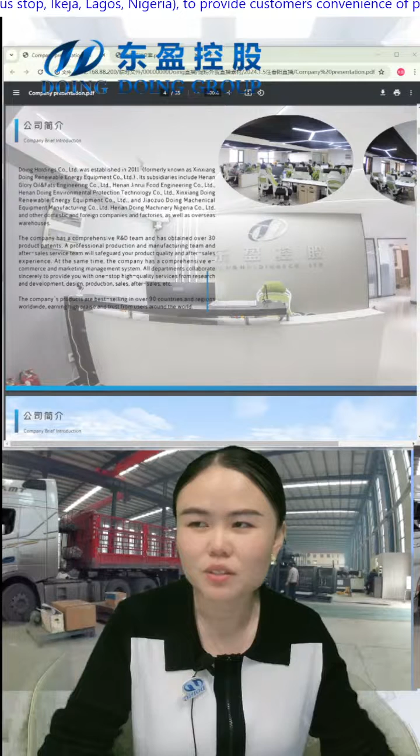Now its subsidiary companies include Henan Glory Oil and Fats Engineering Company, Henan Jinrui Food Engineering Company, Henan Doing Environment Protection Company, and Jiaozuo Doing Mechanical Equipment Manufacturing.

We also have our overseas company in Lagos, Nigeria. If you are in Nigeria or in the surrounding countries, welcome to visit our office anytime.

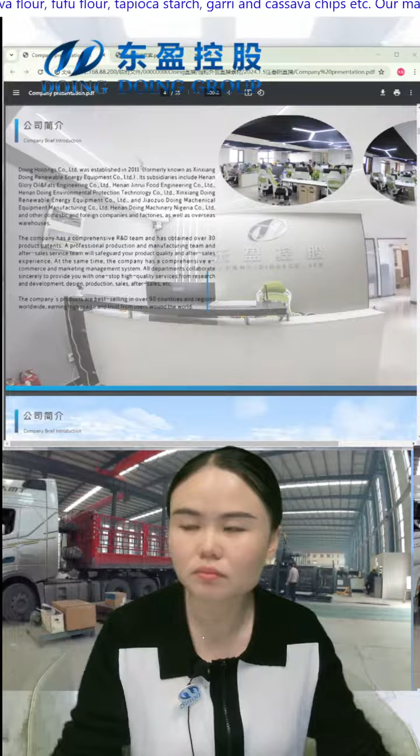Our company has our own manufacturing workshop and our own engineers, so we can supply complete service from the factory design to the equipment design, manufacture, shipment, installation, and after-sales service. Now our equipment has been exported to more than 90 countries around the world.

Okay, now what you see is our factory. It's located in Wuzhi County, Jiaozuo City of Henan Province. It's about 50 minutes from our office to the factory by drive. Our company was established in the year 2011, but at the beginning we were a trading

company, and in the year 2016 we owned our own manufacturing workshop to fabricate machines. So we can ensure that our price is the most competitive based on good quality and the same machines. Now the total area of this workshop is more than 10,000 square meters.

So next is the introduction about the different subsidiary companies. The first one is Henan Jinrui Food Engineering Company. This is the company I'm working for. It's mainly for cassava processing equipment and starch production lines. In China, we mainly do starch projects like potato starch factories and sweet potato starch

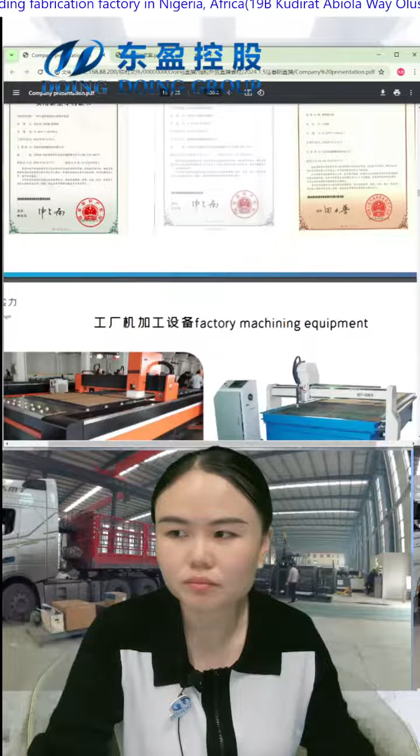And next is the manufacturing equipment in our factory that ensures high efficiency and good quality of fabrication for machines, like the laser cutting machine and the plasma cutting machine. If we put drawings inside, it can cut steel automatically, so that when we fabricate the machines, they can weld well.

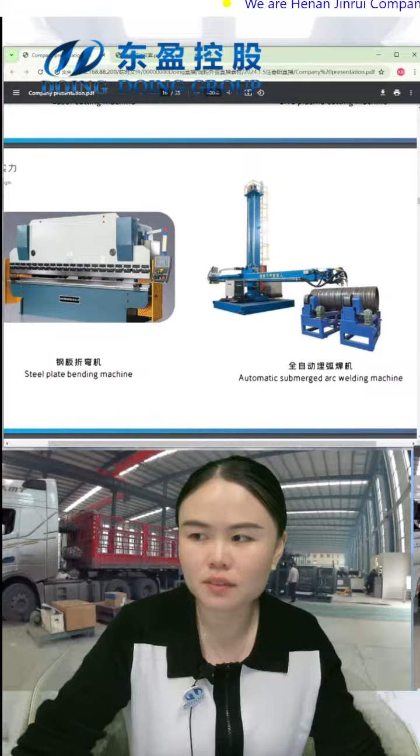And we also have the steel plate bending machine, the welding machine, and some drilling machines. And this is how it looks inside. This is the inside of the workshop.

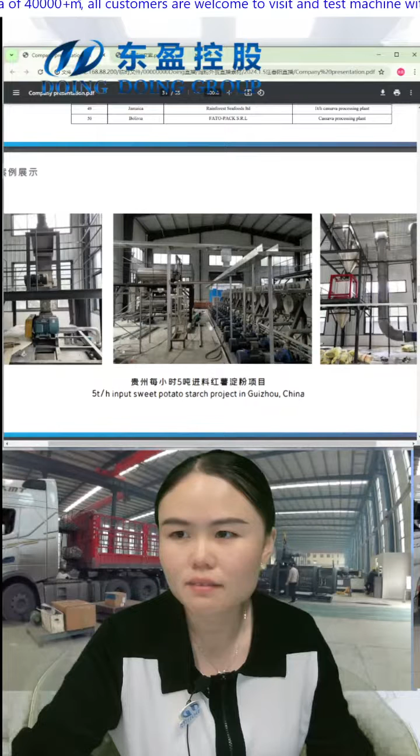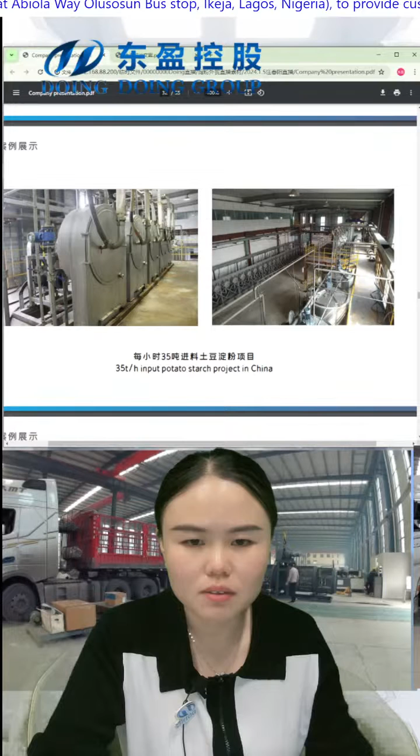And next are some pictures of these project cases. This is our sweet potato project we did in Guizhou province of China. Its capacity is to process 5 tons of sweet potato per hour. And this one is our potato starch project we did in Henan province. Its capacity is 35 tons potato input per hour. It's a relatively large one.

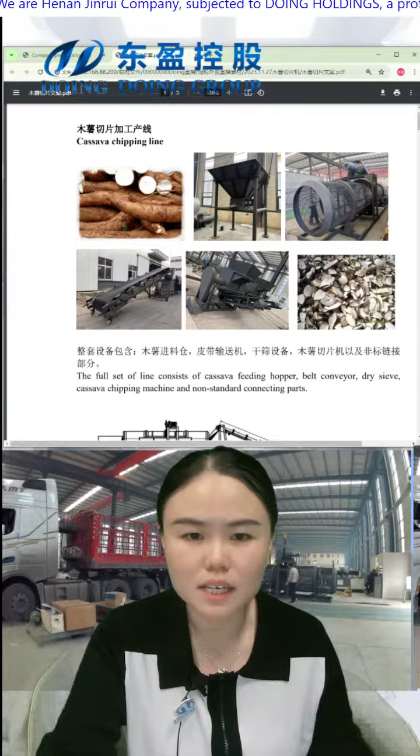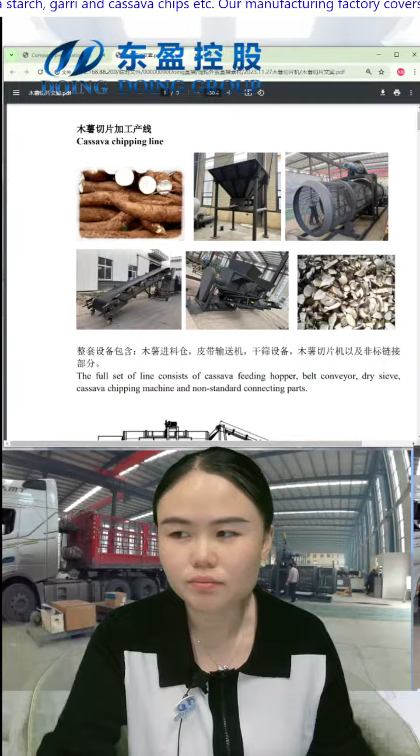Okay, so today we are going to introduce you the cassava chipping line. Our machines do cleaning and chipping of the cassava so that finally you can get the dried chips. These chips can be used for industrial use like ethanol production and animal feed production. The full line consists of the cassava feeding hopper, the belt conveyor, dry sieve, cassava chipping machine, and the non-standard connection parts. Let's see these machines one by one.

Okay, now the drawing you can see is how the line will be laid out. We can read it from right to left. At the beginning is a hopper. We put cassava tubers into this hopper, and under the bottom of the hopper there is a vibration device that sends cassava tubers evenly to the belt conveyor. After that, the belt conveyor sends cassava to the dry sieve cleaning machine. The dry sieve removes the surface impurities from the cassava and discharges them to the ground.

After cleaning, cassava will drop down to the chipping machine, and the chipping machine will slice cassava to get

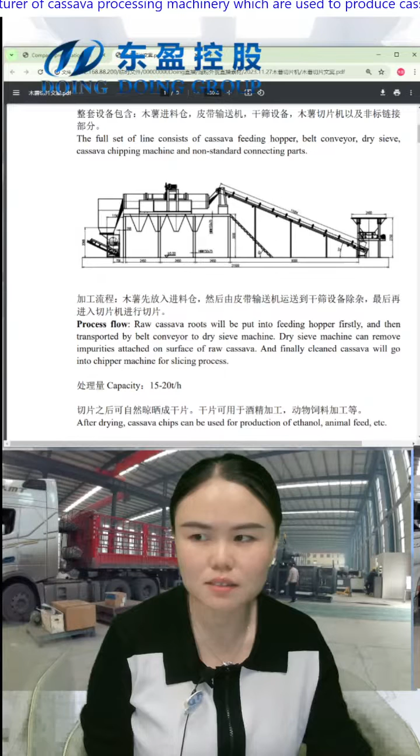Capacity of the line is 15 to 20 tons per hour. It is a big capacity. After drying, the chips can be used for production of ethanol, animal feed, etc.

So next, let's see these machines. So the first one is the cassava feeding hopper. For all large-scale cassava processing factories, at the beginning there will be a feeding hopper. It is used for short-term storage of cassava raw materials at the front of the production line.

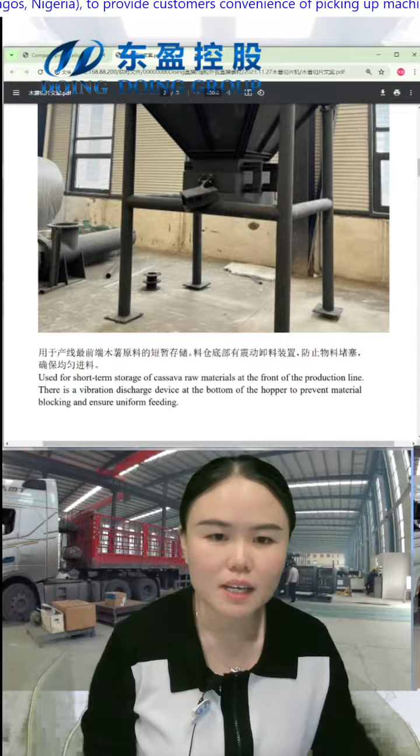There is a vibration device, the discharger device, at the bottom of the hopper to prevent material blocking and at the same time ensure uniform feeding of cassava to the belt conveyor. After the feeding hopper, we come to the belt conveyor machine. This is the belt conveyor machine. It can be made as mobile type or fixed type.

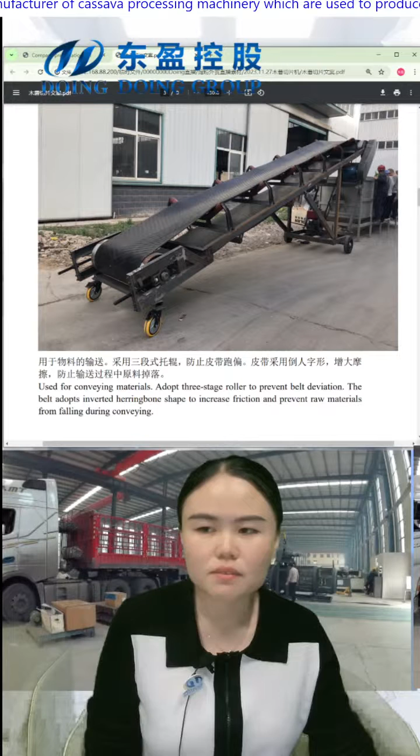And this belt conveyor is used for conveying materials. Here it's used for conveying cassava tubers from the feeding hopper to the dry sieve machine. The belt conveyor adopts a 3-stage roller to prevent belt deviation. The belt adopts an inverted herringbone shape to increase friction and prevent raw materials from falling down during conveying.

After the belt conveyor, the cassava will be sent to the dry sieve machine. This is the dry sieve machine. It's used to remove impurities attached to the surface of raw cassava roots, such as soils, stones, and grass, etc. After impurities are removed, they will be discharged through the lower collecting bucket.

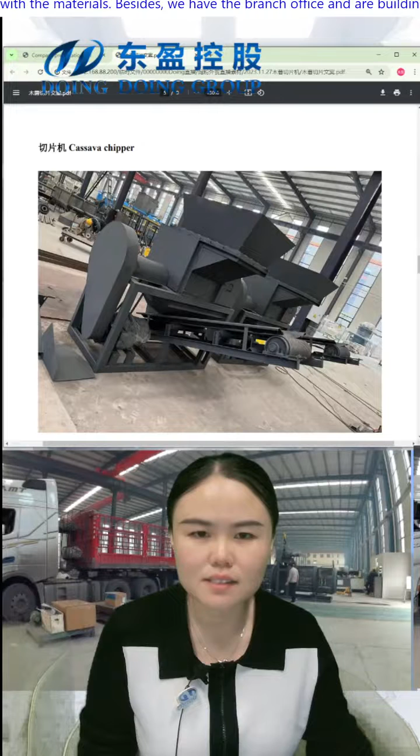After that, here comes the final stage, the slicing process. This is the cassava chipping machine. It's used for cassava slicing. Blade installation adopts cylinder type, increasing the processing capacity.

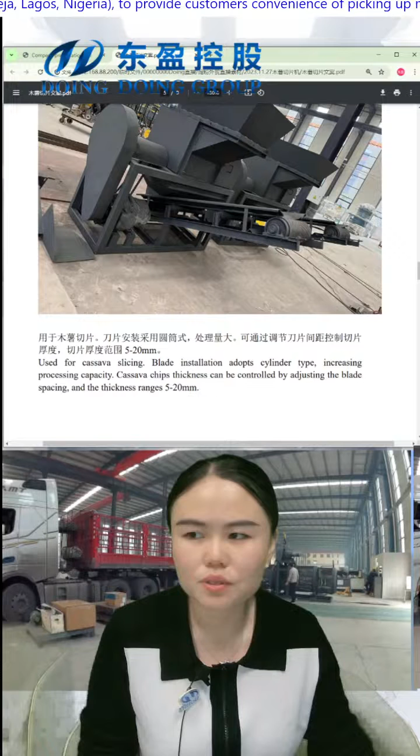Cassava chips thickness can be controlled by adjusting the blade space, and the thickness range can be between 5 to 20 millimeters. That means you can adjust the thickness of chips according to your request. It's very easy. You just need to adjust the blade spacing to achieve the required thickness.

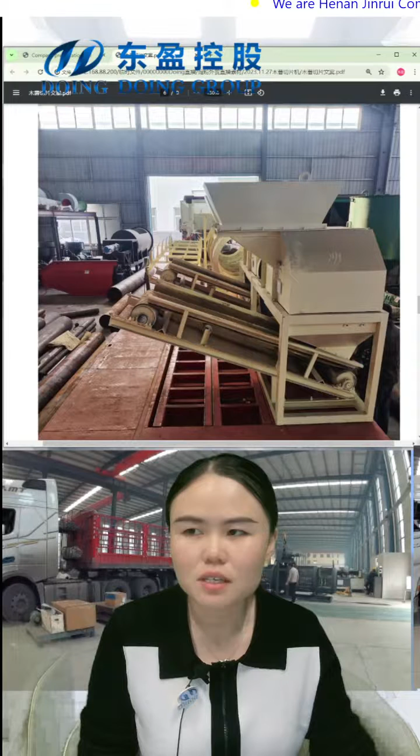Okay, and following, I show you the delivery picture. This picture shows one cassava chipping line we shipped to Laos. You can see the dry sieve machine, the chipping machine. For this line, we matched two chipping machines so that the capacity could achieve 15 tons per hour. And the small parts are packed well in the wooden case. Okay.

Next, I will show you a video of the shipment of a cassava chipping line to another client. This is the fastest speed video. So firstly, the dry sieve machine was loaded onto the truck. So this video records the whole process of loading the equipment in our workshop. Workers

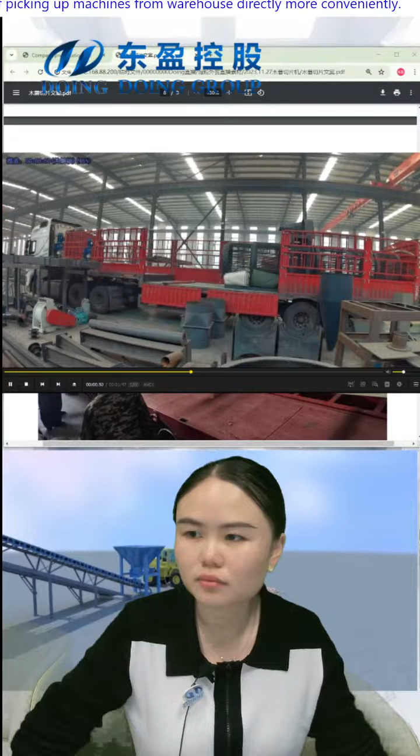Okay, now the chipping machine was loaded onto the truck. This is the hopper, the feeding hopper. You can see that it has a very big size. Okay, all machines are loaded and then shipped out of the workshop.

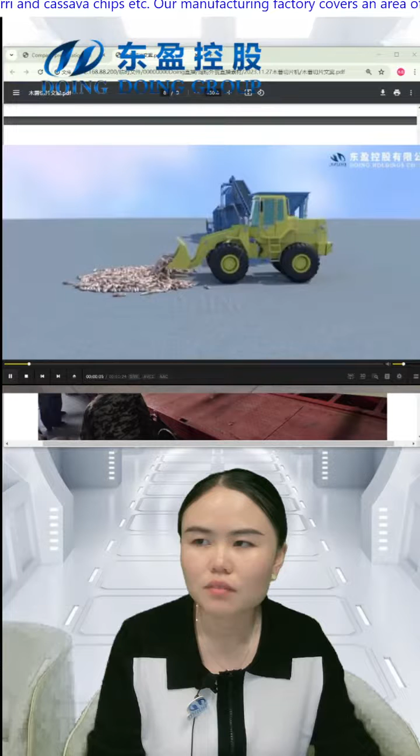So now I'm going to show you our 3D video so that you can have a better understanding of the whole process. Okay, so firstly, the wheel loader will put cassava roots into our feeding hopper. And as you can see, at the bottom of this feeding hopper, there is a vibration device that feeds cassava tubers to the belt conveyor.

This vibration discharger is to prevent material blocking here, and at the same time it can ensure even feeding of cassava roots to the belt conveyor. And then the belt conveyor will transfer cassava to the dry sieve machine.

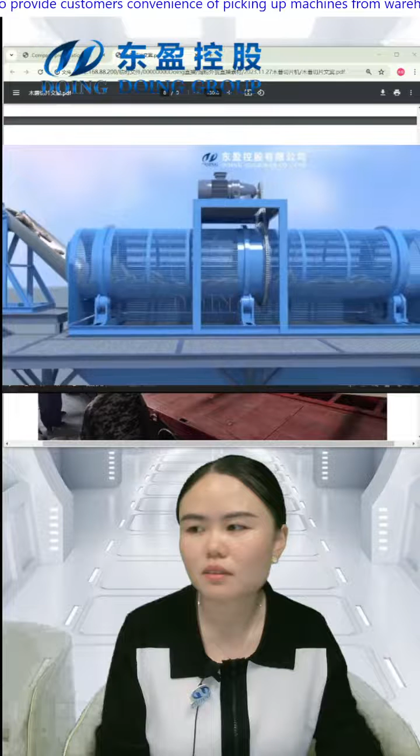This is the dry sieve machine, and inside there is strong friction between this machine and the cassava roots, so that the impurities attached on cassava roots can be removed and discharged. And after that, cleaned cassava will then drop down to the chipping machine.

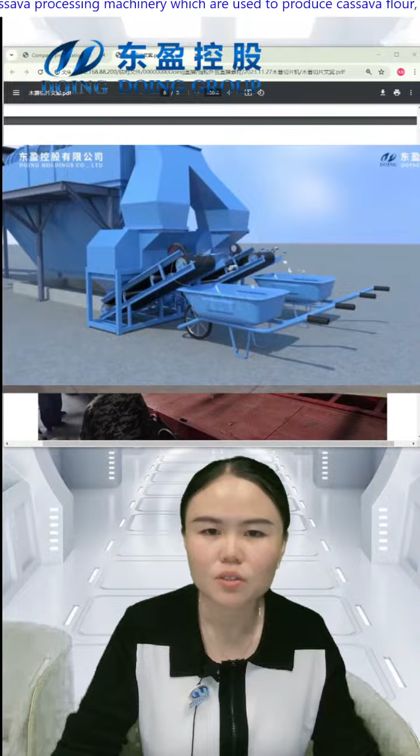This chipping machine will slice cassava roots automatically. And after slicing is finished, it will be transferred by the belt conveyor. And then you can put small carts or small containers here to collect the cassava slices.

After slicing, these chips can be put on the ground for sunlight drying, or you can put them on containers built up in several layers to make the drying more efficient. Okay, this is the whole process of the cassava chipping line. And let me find some running video of the cassava chipping line.

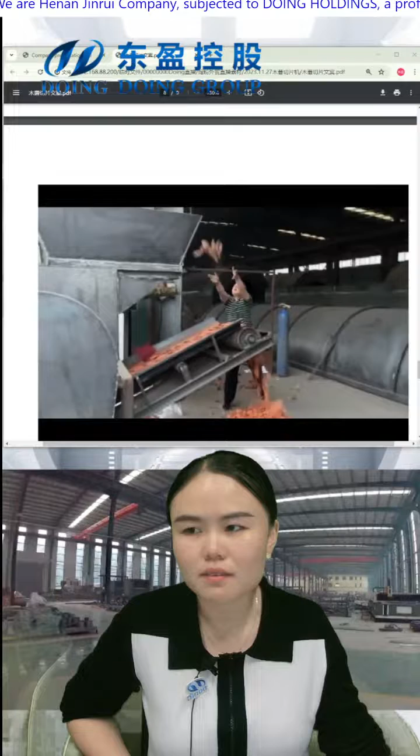Okay, this video is for the test of cassava chipping machine at our factory. Our engineer was there to guide the workers to test this machine. We use sweet potato to test the slicing machine. As you can see, the machine runs well and the sweet potatoes are sliced into very thin thickness.

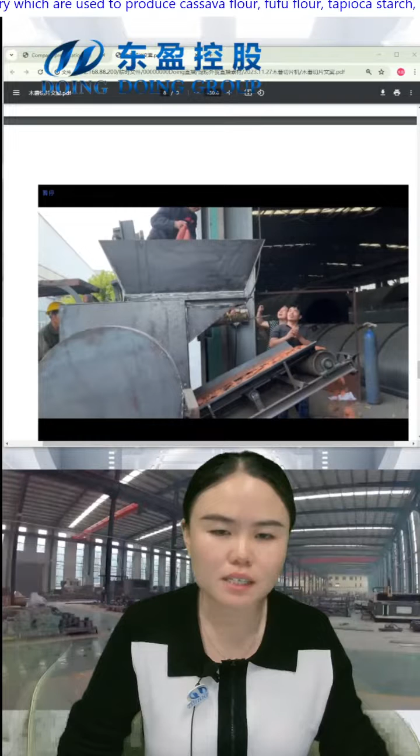So for every project before shipment, we will test the equipment in our factory so that we can ensure the equipment will have no problem when it's time for running.

And I also got a video from our client project site. Let me find it for you. Wait a moment, please.

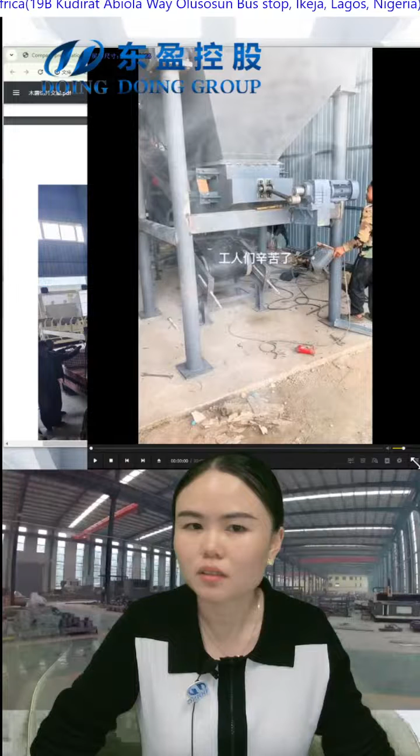Okay, this video is from our client. They are installing the cassava chipping line: the feeding hopper, the belt conveyor, the dry sieve, and the chipping machine. This video is from our client.

From the video, you can see that the equipment has very high quality, and the material we are using is very good and thick, to ensure that the machines have a long service life.

Okay, so this is the machine used for cassava chipping. This chipping line is mainly used for ethanol production and animal feed production. The final chips are for industry use only. And if you want to...

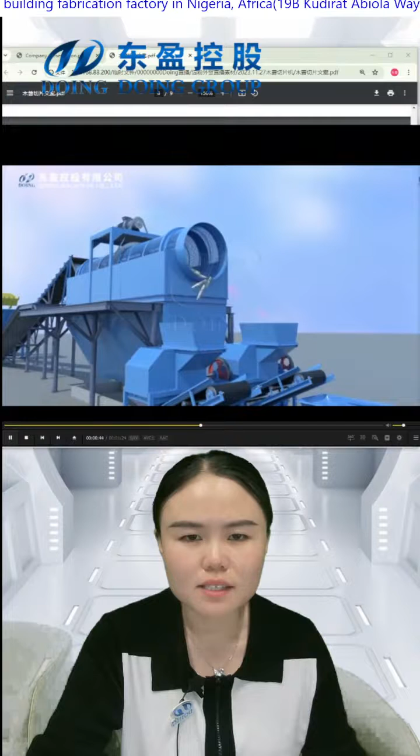This dry sieving machine will remove surface impurities like the soils and the stones, and after that, clean cassava drops down to the chipping machine to be cut into slices.

After slicing is finished, the chips will be transferred by the belt conveyor to another place. You can put your small container here to take out the chips and transfer it to the ground for sunlight drying, or put it on a multiple layer container to make the drying more fast and efficient.

So this chipping line is actually very simple and is very good for a beginner who wants to do cassava processing, and the investment is small compared to other cassava products. You just need to buy several machines to make a complete line, or if you just want to start with cheaper equipment, it's no problem at all.

So some clients, actually in the market, after they get the chips, they dry it and then grind it to make cassava flour. If you are making animal feed flour, this machine is no problem at all. But if you are going to produce edible food cassava flour, you should use another machine.

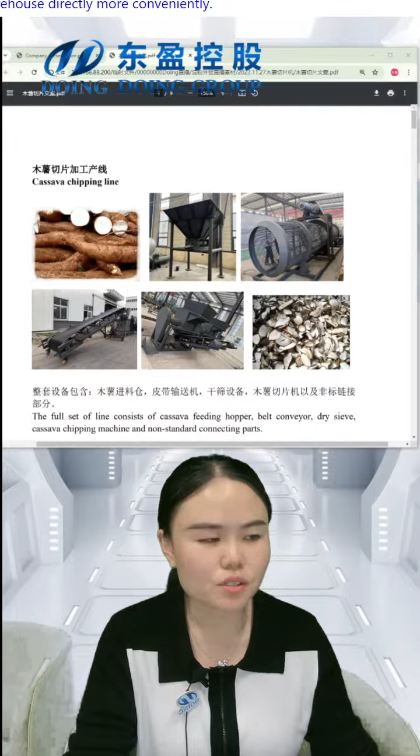So just like I said, apart from the cassava chipping line, we also have machines for cassava flour. Next, I'd like to introduce you to our machines used for edible flour production. Wait a moment, please, let me find the machines used for food-grade cassava flour production.

Okay. Sorry. The 3D picture you saw now is for the cassava flour production. Let me find the video for you.

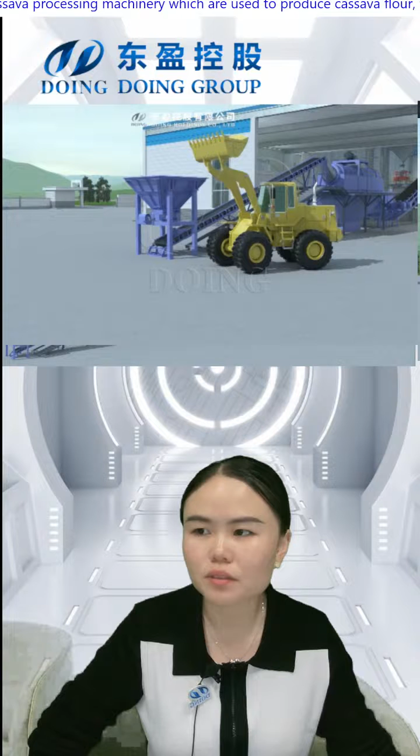At the beginning, firstly, the wheel loader will put cassava tubers into a feeding hopper, and through the vibration device at the bottom of the hopper, cassava will be sent at even speed to the belt conveyor, and through the belt conveyor, cassava will be sent to the dry sieve machine. This dry sieve machine is used to remove the surface impurities, and after cleaning, the impurities will be discharged and collected by the hopper under the dry sieve machine.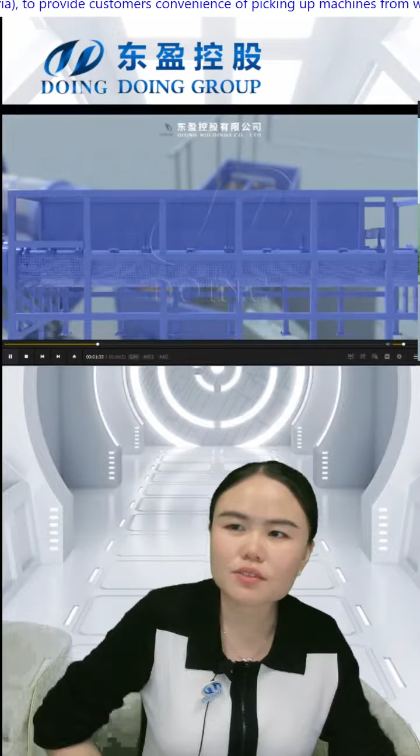And after cleaning, cassava will drop down to the washing machine. This machine we call a paddle washer. The slot is full of water, and by stirring, cassava tubers and water are mixed together, and the bottom mesh will separate the impurity sand and cassava gradually. After that, clean cassava will be discharged from the outlet, and then the clean cassava will be transferred by the conveyor to the peeling machine.

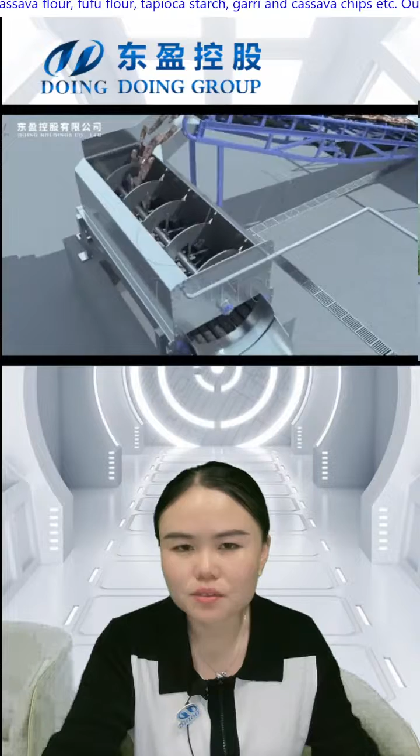As we know, food grade cassava flour has very high requirements for safety. So if you are going to produce food grade and high quality cassava flour, a peeling machine is very necessary. This peeling machine will remove the first and second layer of cassava roots, and the peel residues will be discharged.

After that, the peeled cassava will be sent to the cutting machine firstly. The cutting machine will cut cassava into small pieces firstly, and the small pieces of cassava will drop down to the rasper. The rasper has a very high rotation speed. It will crush cassava pieces into very fine particles.

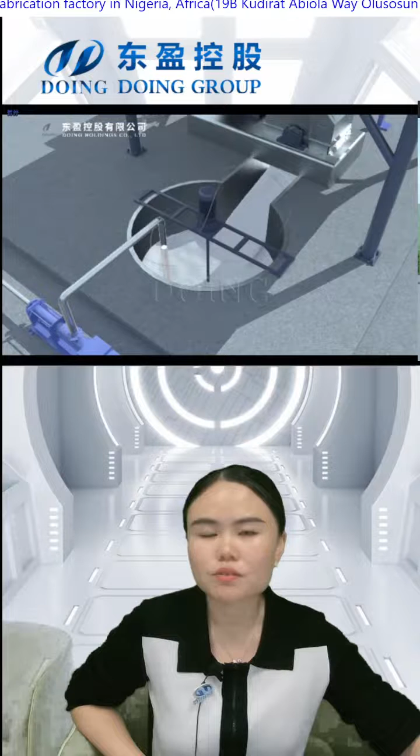And after that, we get the cassava pulp. This pulp will be stored in our tank or a construct pool, and then by the pump, cassava pulp was sent to the desander machine.

This desander machine is used to clean out the small sand debris. The sand debris will be discharged and drop down to the bottom of the cyclone, and then you open the valve and discharge it.

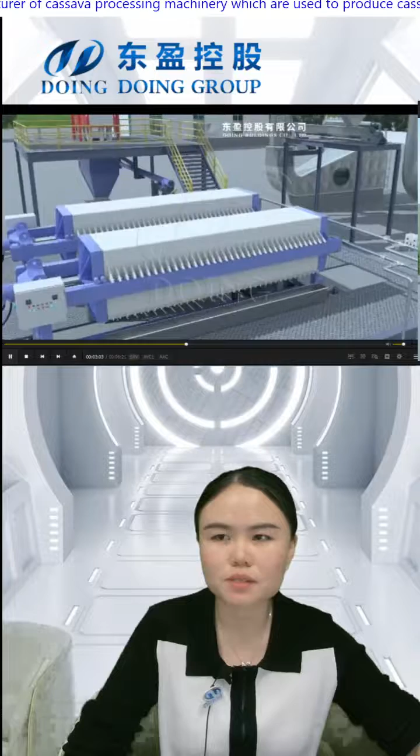After the desander, the cassava pulp will be stored in our buffer tank, and through the buffer tank, the pump will send the cassava pulp to the filter press machine. This is the plate and frame filter press machine. It's used for cassava pulp dewatering. After this machine, the water will be extracted out and discharged, and then we get the wet cassava cakes.

These cakes will drop down to the belt conveyor and then be sent to the screw conveyor. This screw conveyor will transfer the wet cassava cakes to the drying machine.

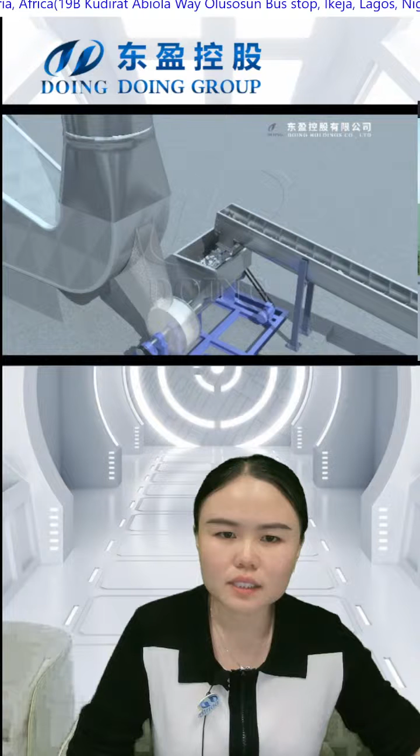Through the inlet screw feeder, the cassava cakes are crushed into wet powder firstly, and then sent by the fan to the belt conveyor. This is the heat exchanger of the flash dryer. It will connect to the steam boiler, so that when the cold air passes through the heat exchanger, it will become hot air inside.

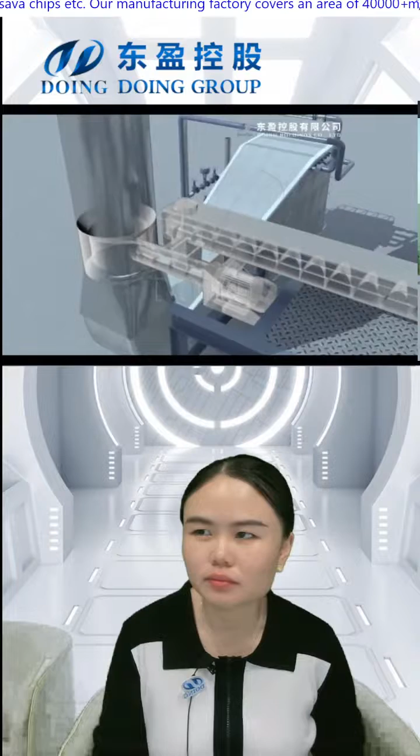Inside the drying tube, the wet cassava powder and the hot air mix together. Through the heat exchanging, the moisture of the wet flour will be reduced, and after that we have the dried cassava powder. Because cassava flour is very hard to dry, normally we use two-stage drying. This is the first stage, and after the first stage is finished, it will go to the second stage. Okay, this is the second stage.

After the second stage drying is finished, the final dried flour will be collected into a silo or a tank, and then the dried flour will drop down to the sieving machine. The sieving machine will separate the coarse flour, the big particle flours, so that finally what we get is the fine quality cassava flour. This fine quality cassava flour will then be packed by the packaging machine.

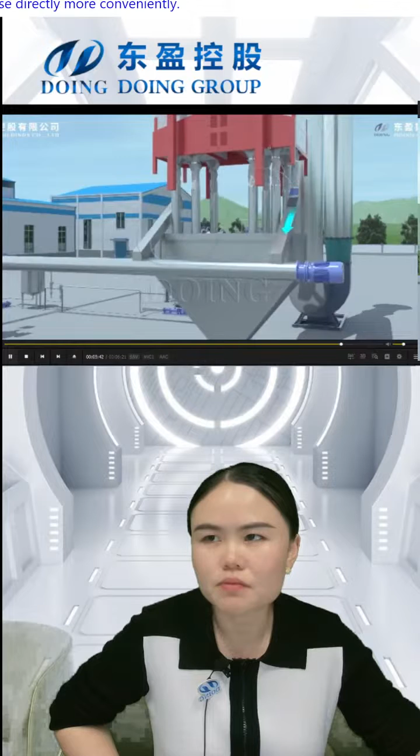At the same time, the big particles separated from the sieving machine are not wasted. They will be collected and recycled, then sent to the fine miller machine to be crushed again to get fine quality flour, and this flour will be returned back to the screw conveyor and go through the dryer again.

Okay, so this is the process of food grade cassava flour production. Next, let me show you the machine, the real picture of cassava flour.

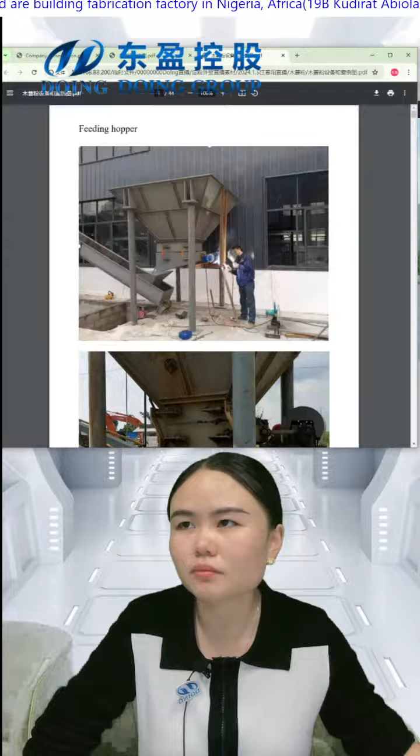Okay, so just now we saw the 3D video for cassava flour production. Now I'm going to show you all these machines one by one with real pictures.

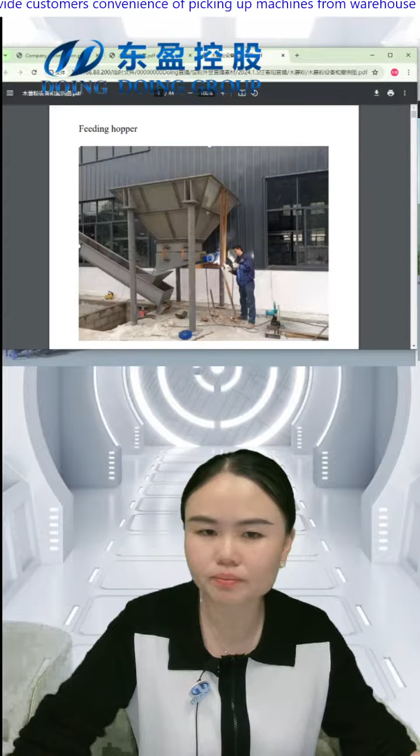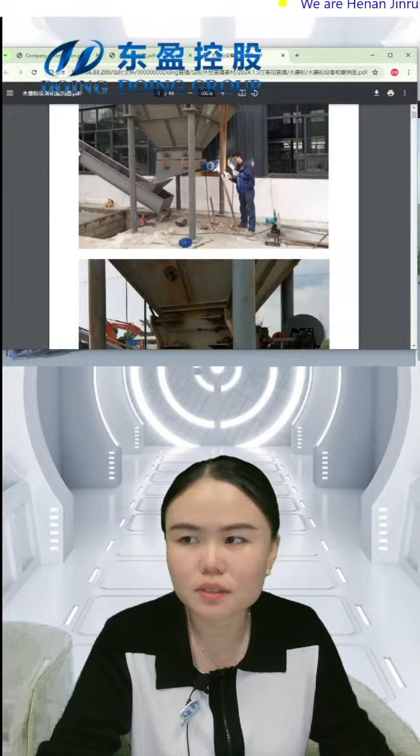Firstly, this is the feeding hopper. It's at the beginning of the whole production line, used for short storage of cassava tubers. At the bottom of the feeding hopper there is a vibration device to send the cassava tubers to the belt conveyor.

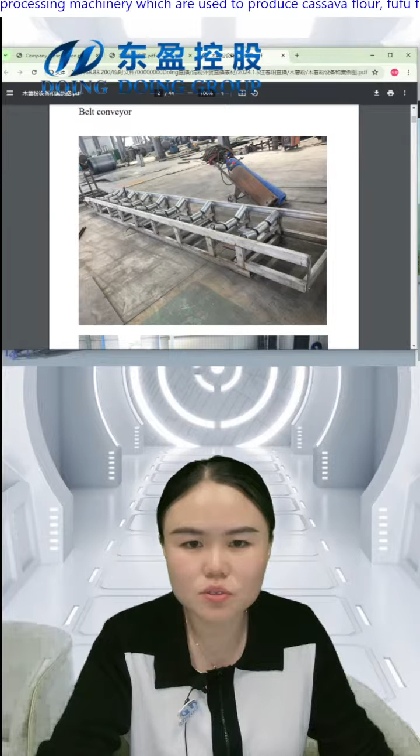This is the belt conveyor. You can see that the belt conveyor rollers are 3-stage rollers, which can well prevent belt deviation during running. Strong friction was made on the belt conveyor to avoid cassava dropping down during conveying.

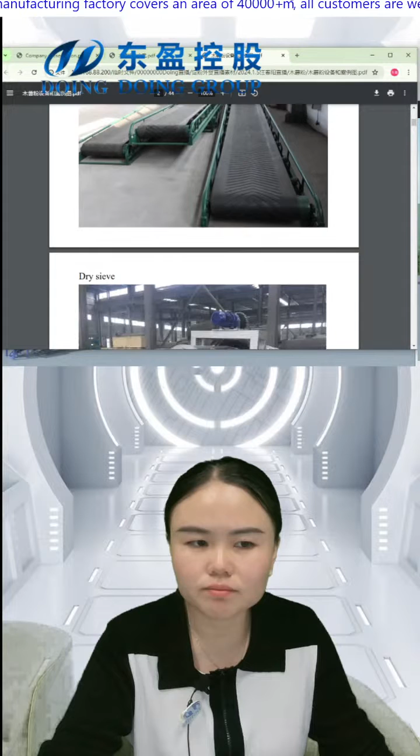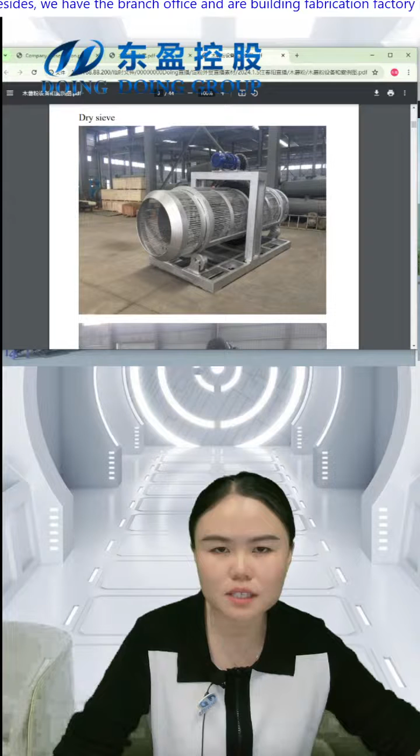After that, this is a dry sieve machine. It's used to remove impurities attached on the cassava surface. This machine is commonly used in cassava flour lines, cassava starch lines, and also the cassava chipping line we showed you earlier contains this dry sieve machine.

This is how it looks like inside. We can weld small rods inside to increase the friction and improve the cleaning efficiency.

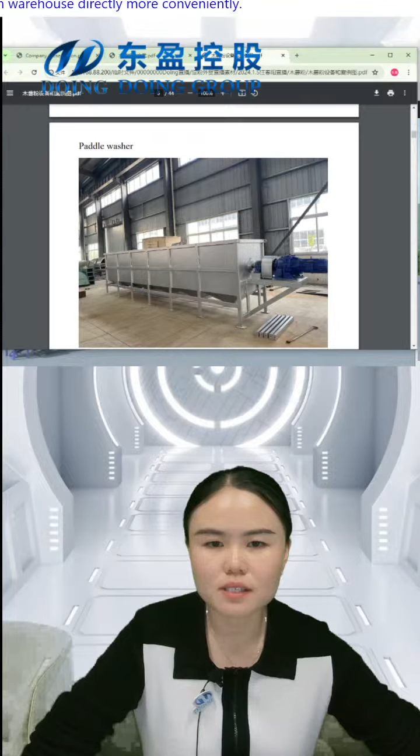After dry sieve cleaning, the next is the paddle washer. This machine is used to wash cassava roots completely using water. The washing trough is full of water, and at the bottom of the washing machine there is a mesh-type plate, so that when water and cassava are mixed together, the small and heavy things sink down through this mesh, and the dirt and cassava tubers are separated gradually.

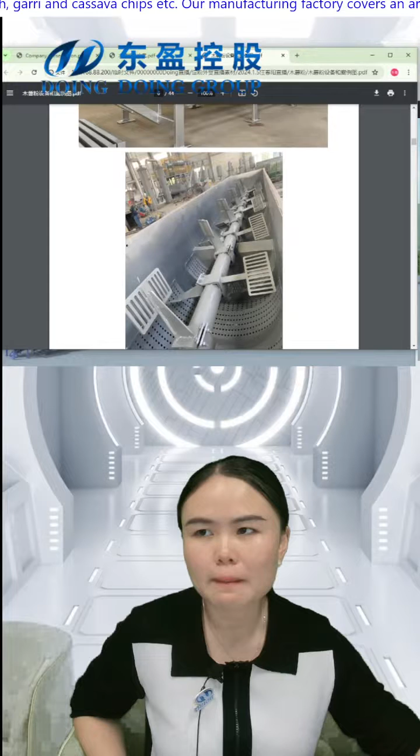At the bottom you can see there are different valves installed, used to discharge the wastewater. And next, these are the paddles inside to push forward cassava from the inlet to the outlet.

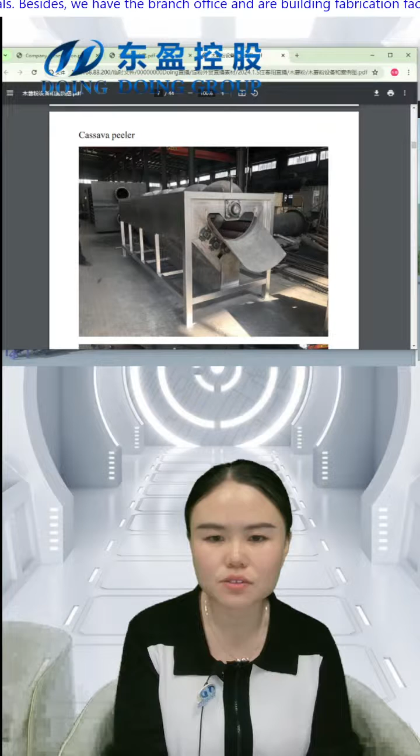After washing, the next is peeling. As we know, if you want to make food grade cassava flour, it's necessary and important to remove the first and second layer of the cassava roots. So our machine adopts sand rollers, which have very strong friction and can remove the cassava peels well.

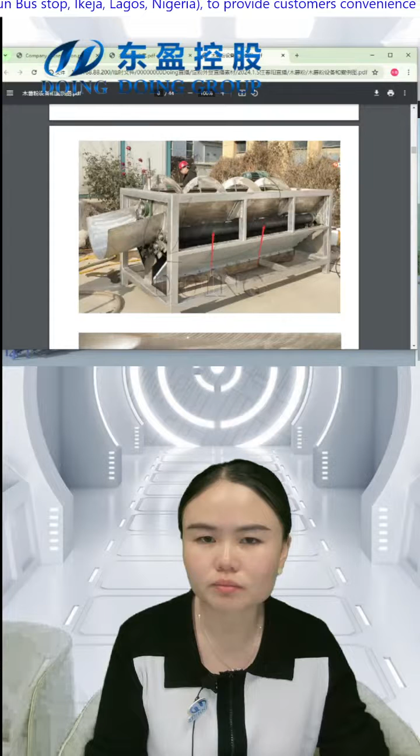This machine is made of stainless steel. This shows the structure, the black rollers you see are the sand rollers. When they touch water, they become very strong, so the peeling efficiency is very good.

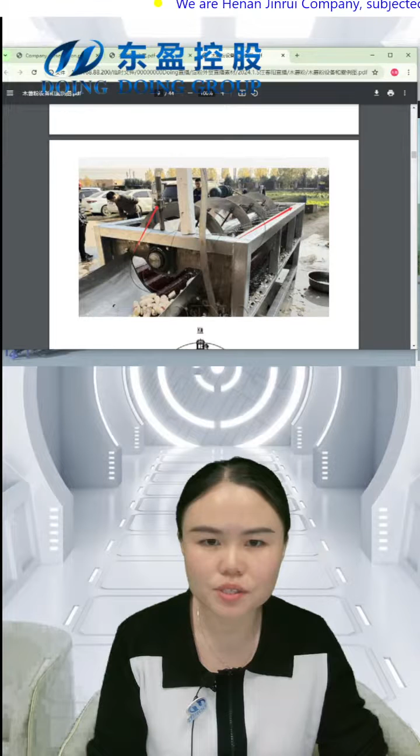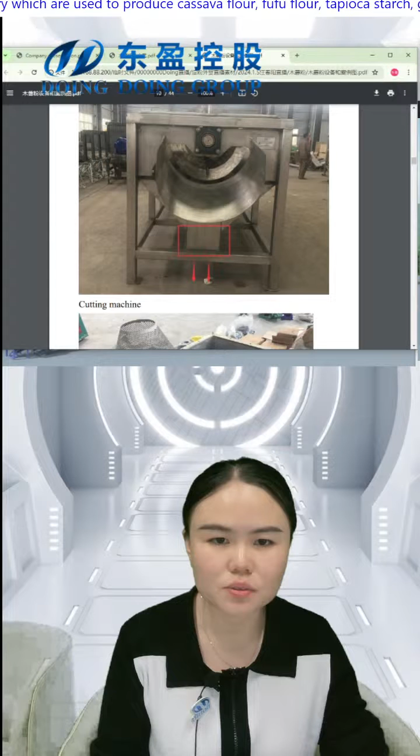During peeling, spray water can be added into this machine to clean out the peel residues. After that, the peel residues are collected by the bottom hopper design and drop down to the ground, or you can build a ditch under it to discharge them outside of the workshop.

After peeling, the next step is crushing. For crushing we adopt a two-stage process. Firstly, we use the cutting machine to cut the cassava pieces into small pieces, and then use the rasper machine to get fine cassava mash pulp.

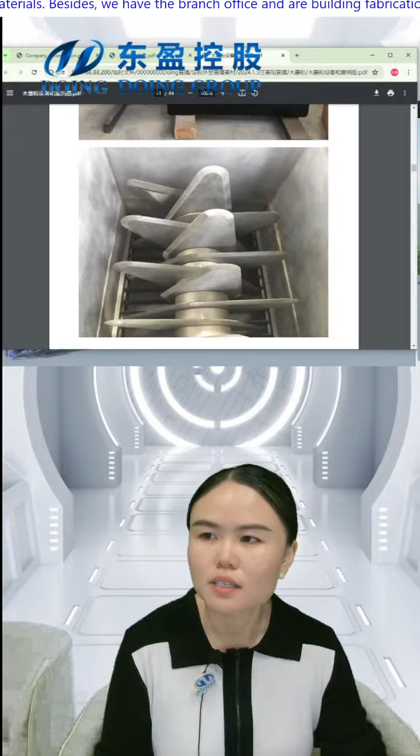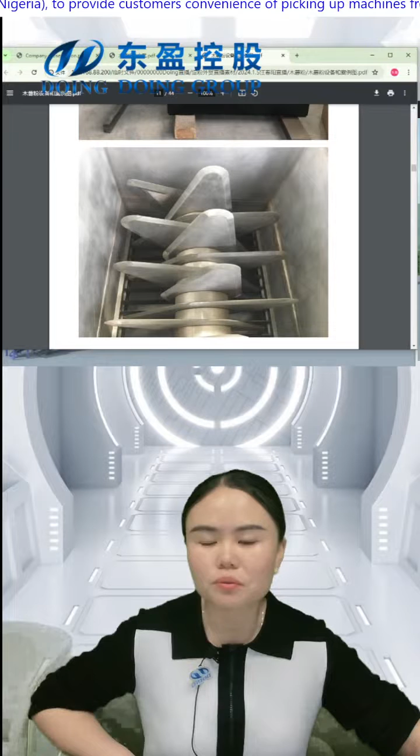This is a cutting machine, and this is how the knives of the cutting machine look. These knives are made of stainless steel, the same material as our cookers, so it's very safe for food production. These knives are made with diamond sizing, making them more durable with a long service life.

Firstly, small cassava pieces drop down through the inlet onto the drum. The drum of the rasper rotates at high speed, crushing the cassava into a very fine mash. After crushing, this fine cassava pulp goes through the gap and drops down to the bottom of the machine.

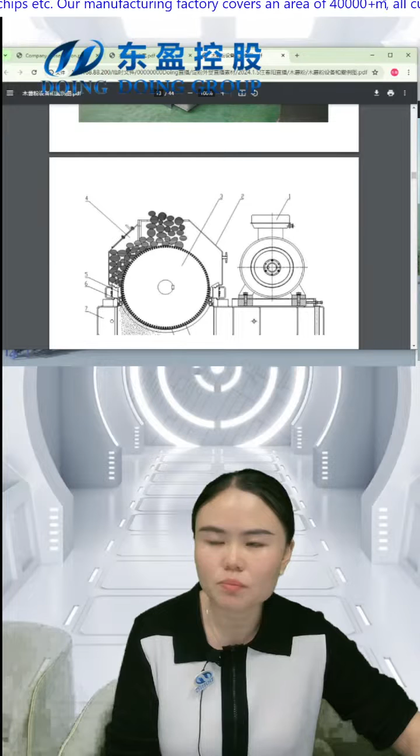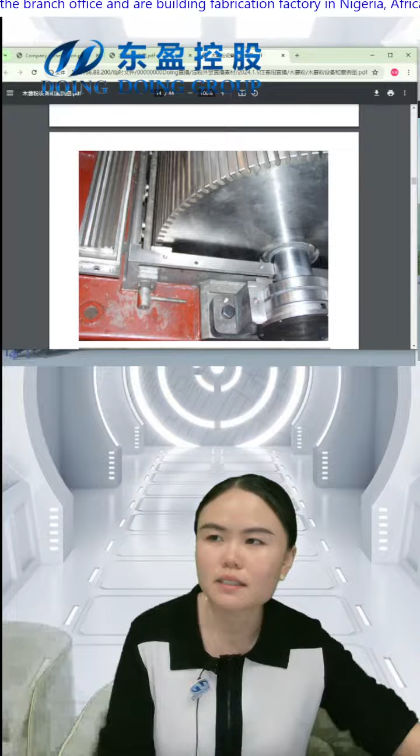This is the structure of the rasper machine, and this is the inside of it. There is a rotating drum, and on this drum a lot of saw blades are installed.

This is the saw blade. It's made of high hardness material, so the saw blades are more durable.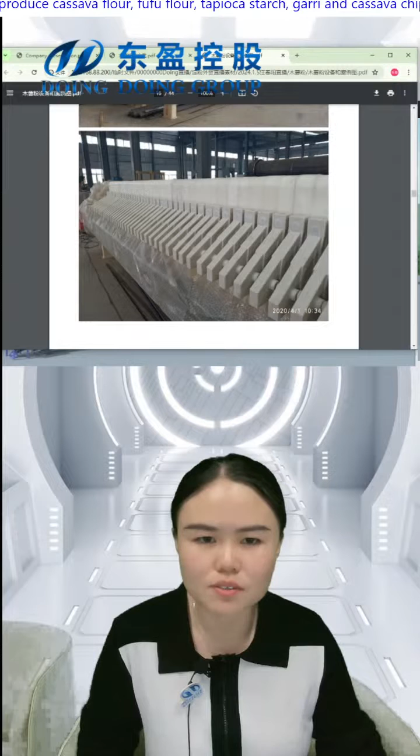After dehydration, we can get wet cassava cakes with moisture content around 40%. After the wet cakes, the next is the drying machine. We use the flash dryer. This is a flash dryer machine. It will dry cassava powders completely to reduce the moisture from 40% to 12 to 14%.

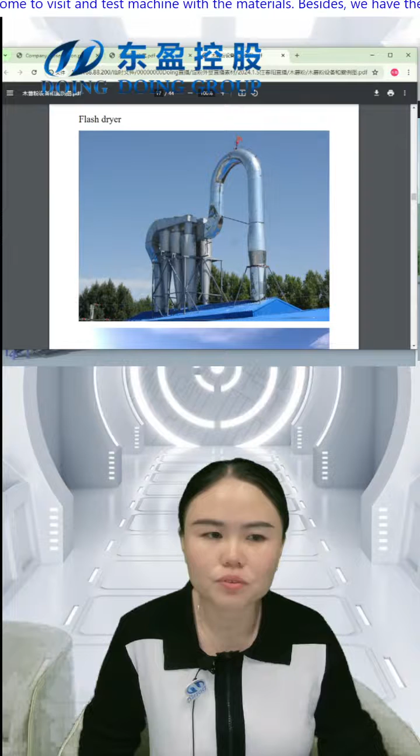To ensure good drying efficiency, we normally adopt a two-stage drying. Normally, a hot air stove or steam boiler works with the flash dryer to supply the heat source. For the fuel of the steam boiler or hot air stove, it can be diesel, gas, or biomass. You can use any fuel according to your local market.

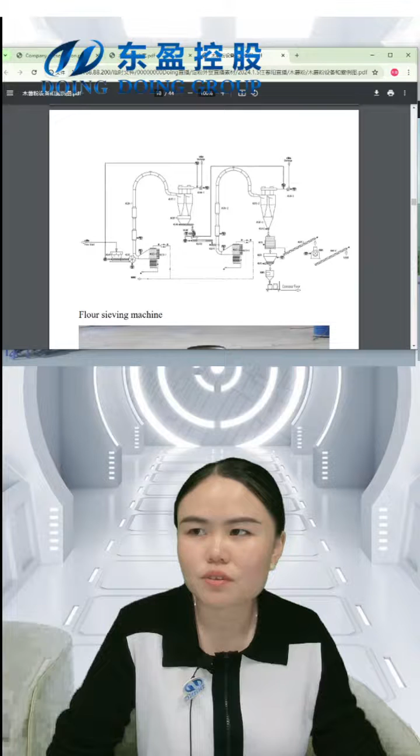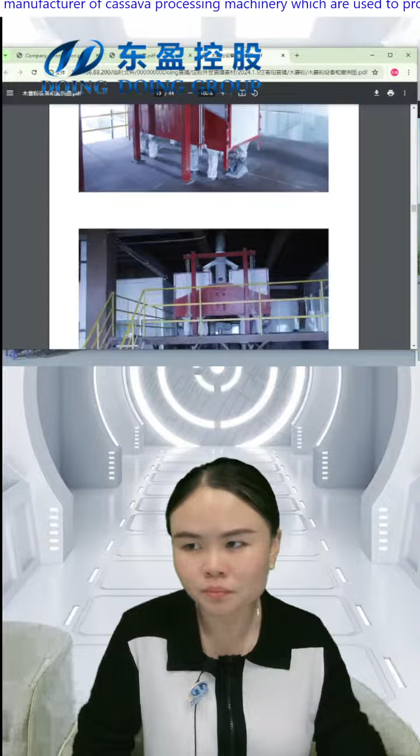This shows the process drawings for cassava flour drying, from the input to the first stage drying, second stage drying, sieving, and packaging. After that, we will use the sieving machine to separate the big particle powder, which we call coarse flour, to get fine quality flour. We can use the vibration sieving machine or the sieving machine in square shape.

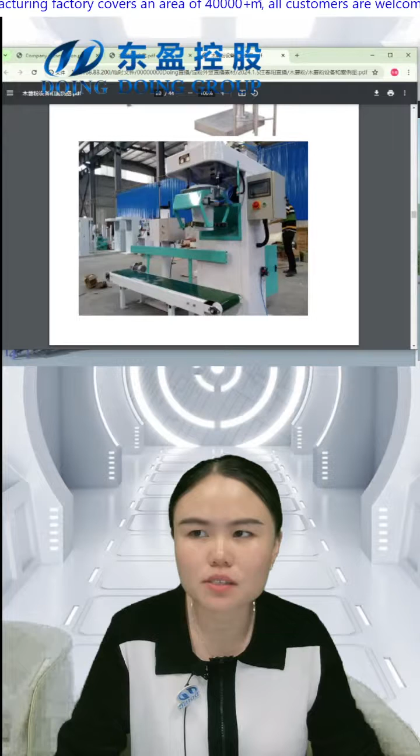After sieving, we also have machines for packaging. This packaging machine is for small bags, like 1 kg to 5 kg. And this packaging machine is for big bags. It can do 25 kilograms or 50 kilograms.

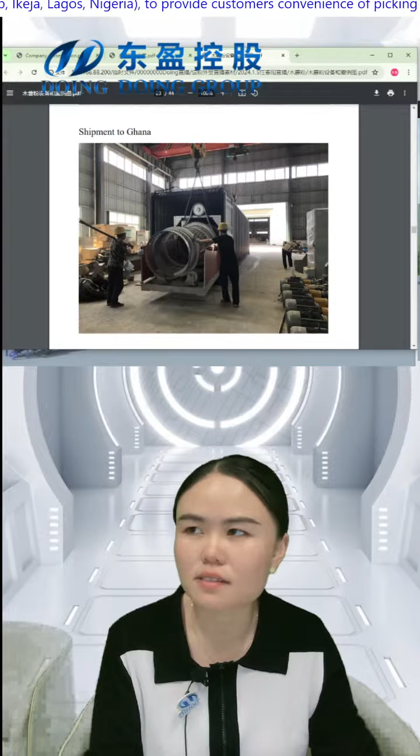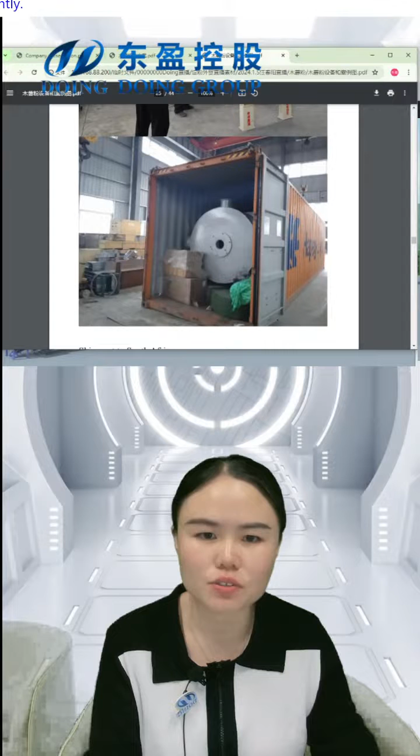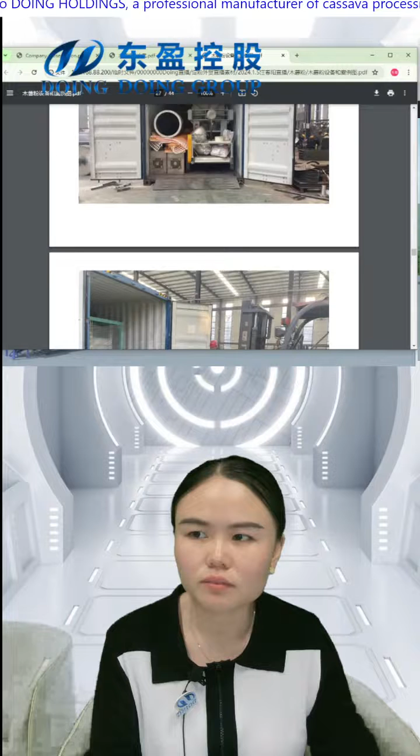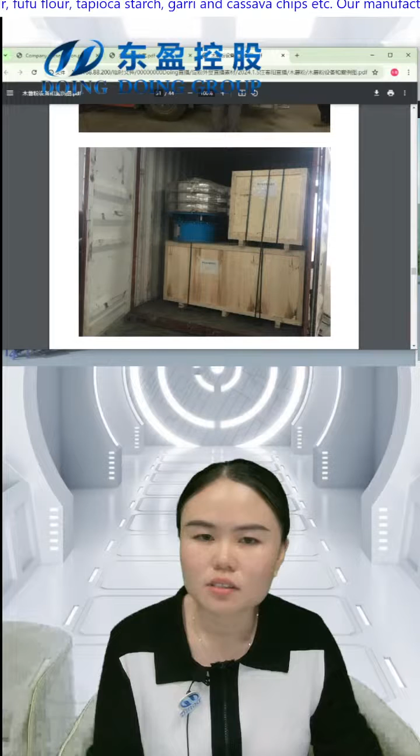The next is the shipment to South Africa: the dry sieve, the flour sieving machine, the plate and frame filter press machine. And these are the pictures of the shipment to a Zambia client. Loading containers inside our workshop. The small parts are well packed in a wooden case.

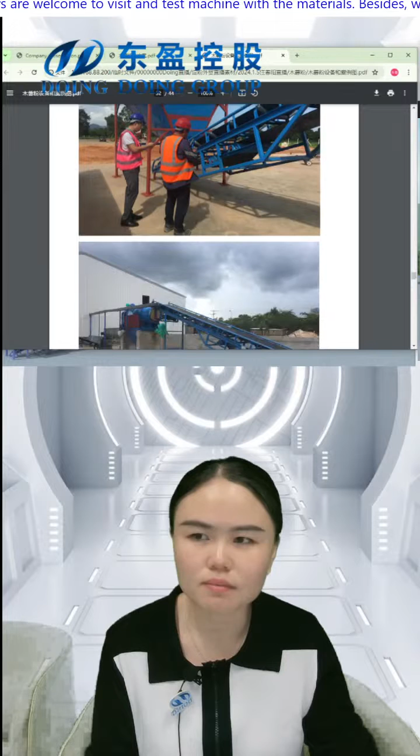Next are some pictures from the project sites. This is from the Tanzania cassava flour project. Our engineers are on site to check machines. This is the installation of the flash dryer. It's very high, so it requires a crane to lift it for installation. This is our cassava flour project in DR Congo, some pictures of the workshop. Another cassava flour project is located in Uganda. It's still in the process of construction.

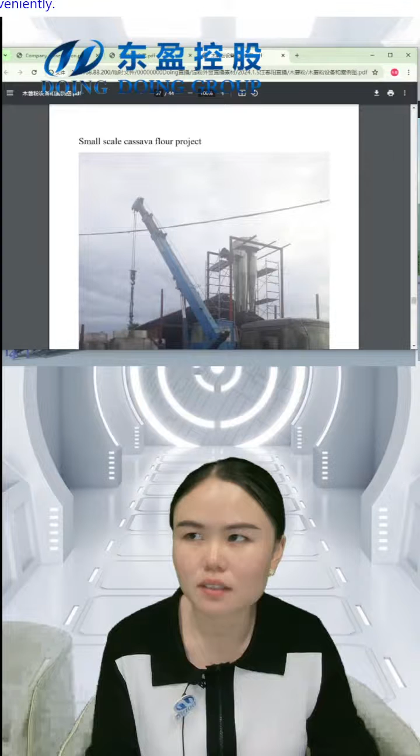Apart from the big-scale cassava flour projects, we also did some small cassava flour projects that are suitable for beginners. This was from the Zambia client. This is from the DR Congo client. This is from a client in Madagascar. Okay.

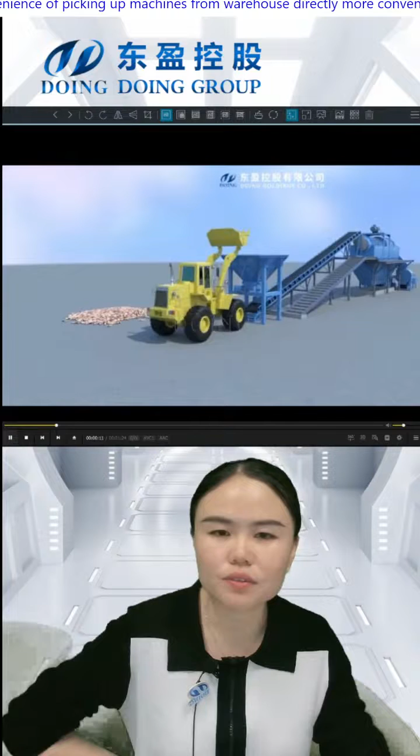Firstly, the wheel loader will put cassava roots into our feeding hopper, and then by the bottom vibration device, cassava roots are sent to the belt conveyor, and through the belt conveyor they go to the dry sieve machine. After dry sieve cleaning, cassava roots drop down to the chipping machine. The chipper will slice cassava into small chips, and after the chips are discharged from the chipper, the belt conveyor sends them out.

These chips can be put on the ground for sunlight drying. You can also put them on our multiple layer containers to dry them faster. After drying, these chips can be used for ethanol production and animal feed production. But if you want to produce food grade cassava flour, we have another design for you. Next time we will introduce the machines for food grade cassava flour production.